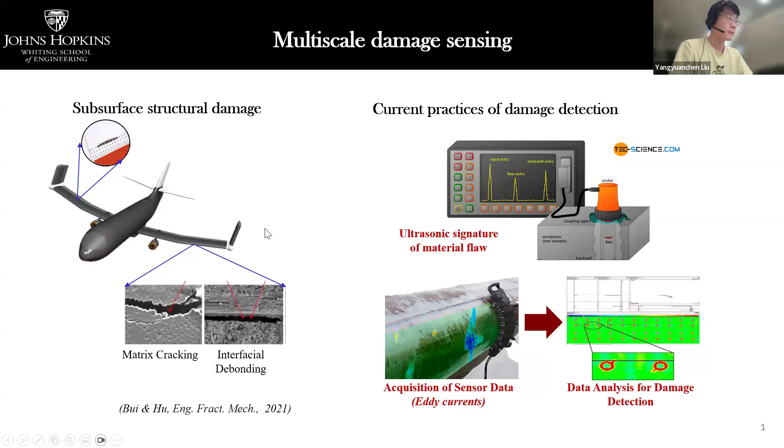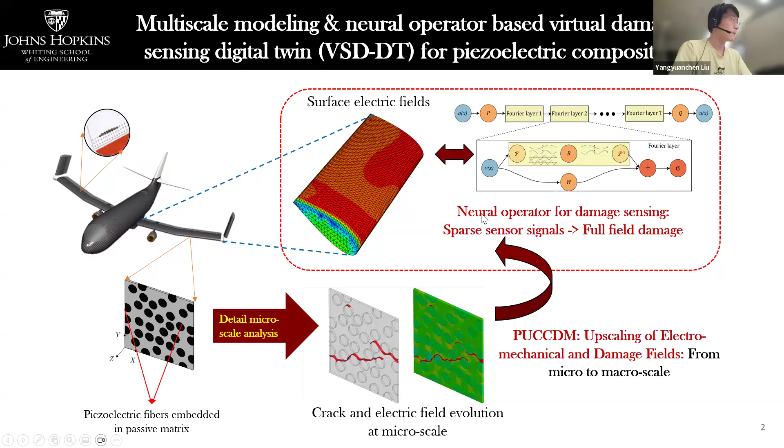So this development work has a two-step approach. The first, of course, is a bottom-up model. That's our physics underlying it, which connects microstructure features to a thermodynamically consistent structure-scale model. So this is our PUCCDM model, completed in previous work. The PUCCDM provides the foundation for the VSD-DT framework.

It is based on the microstructure descriptors, or RAMPs, representative aggregated microstructure parameters. These are used to describe each microstructure. So for our piezocomposite, the microstructure RVE includes fibers and the matrix, and we use the volume fraction and the two-point correlation functions to describe this microstructure.

So these are our microstructure descriptors, and we run about 300 microscale simulations to form this homogenized response database, or MRDB. And these two are used as the input parameters to calibrate the upscaled continuum damage model.

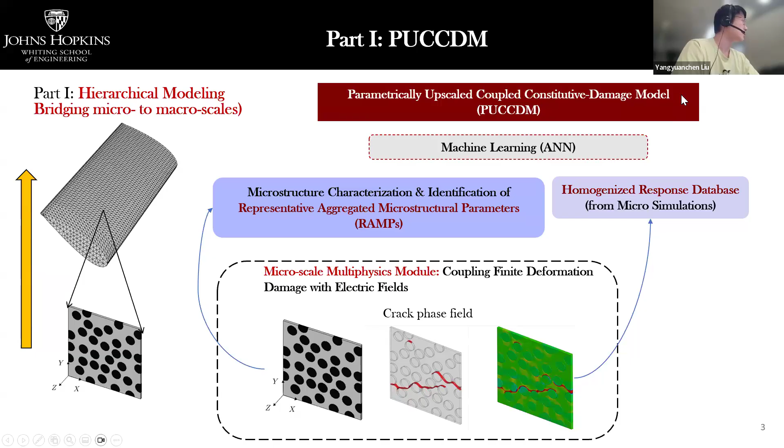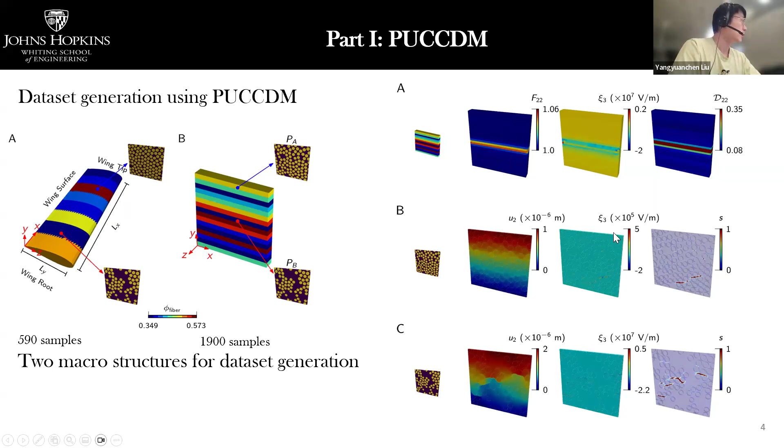Okay, so this is the training dataset for the neural operators. And part two, the stage two, is a geometry-informed neural operator.

This involves connecting the macroscopic electric signals at specific locations, the sensor locations, to microstructural damage, and answering these questions concerning where damage starts and how it propagates at the microscale in the end. So I will introduce this neural operator part in detail in the following slides.

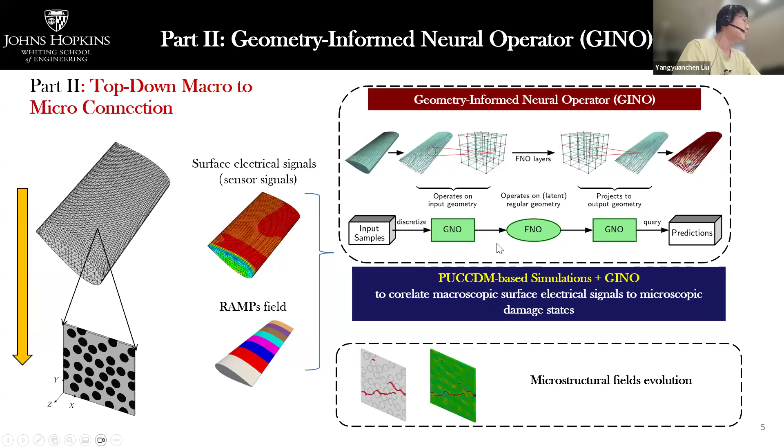Okay, so I will talk a little bit on what is a neural operator and what is FNO and GNO before we come to the result parts. So a neural operator seeks to approximate a mapping between function spaces rather than between fixed size vectors. Given many examples of input-output field pairs, say the boundary conditions and the solutions to a PDE, or initial conditions and the solution field, or just some coefficients, it learns the operator that produces the latter from the former.

For example, for the elliptic PDE, the Darcy flow problem, you have input as the permeability field, and output will be the pressure field. For the initial value problem, like the heat equation, given the temperature field at time 0, what is the temperature at time 1? This is the problem of PDE solving. And the neural operator is trying to solve these kinds of questions.

And it is similar to our standard neural network. Operator learning requires some equations of interest, like your heat equation and the Darcy flow problem. And you need some data sets, and you have a standardized training pipeline, which is very standard for any supervised learning neural network case. For your data set, you initialize your neural network, and you have your input and output for the n epochs. For the forward pass, you compute the prediction from your neural network model, and you minimize the loss between the ground truths and your predictions.

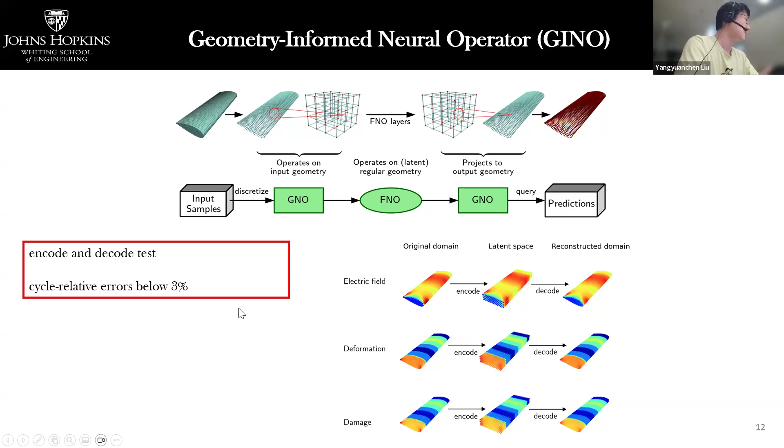So here, before actually using our FNO to predict, I tested just the geometry encoder and decoder to see how well it works. What I did is map these three different fields from the airfoil to the structural latent space and decode them back to the original space. And we compare these reconstructed fields to the original fields. And I find the relative error is below 3%. So I think it's totally acceptable.

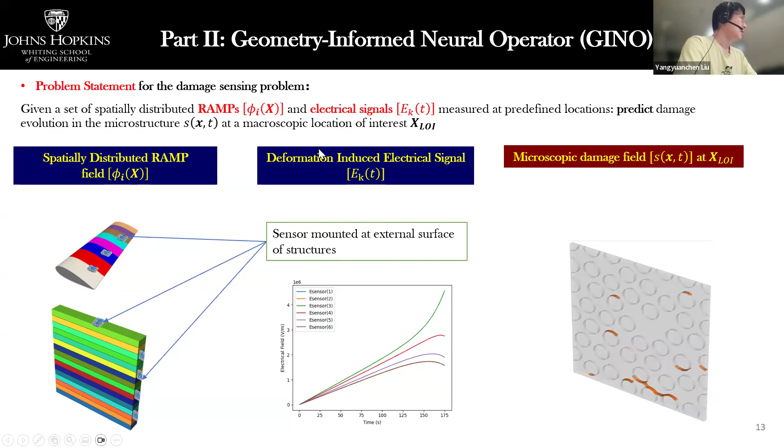Okay, now we can come back to the problem of interest. The problem statement of the damage sensing problem for our case is: given a set of spatially distributed RAMP fields, the material fields, illustrated by different colors here, and electric signals measured at predefined locations. For example, this shows the sensor locations at the external surface. But this does not need to be fixed. We can have multiple different sensor layouts as inputs in our training. And we want to finally predict the damage evolution in the microstructures at any point at the structure level.

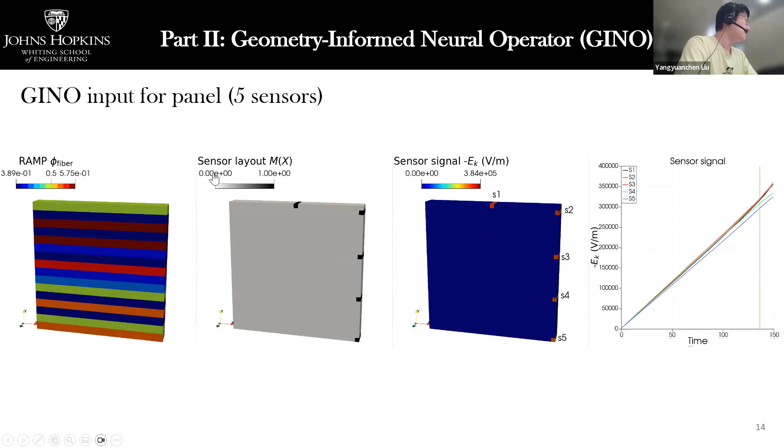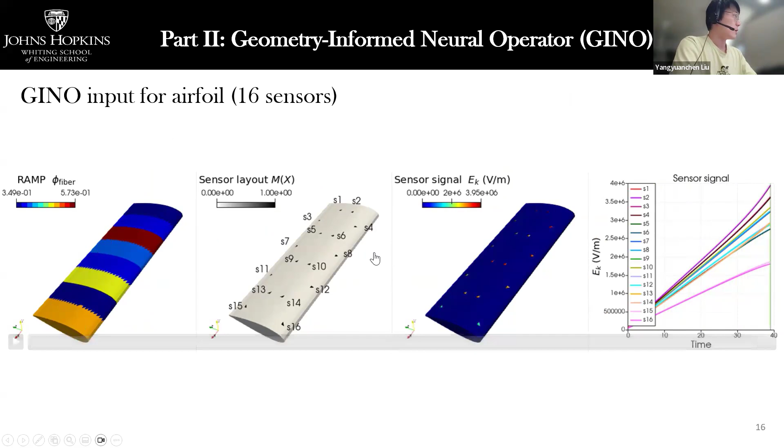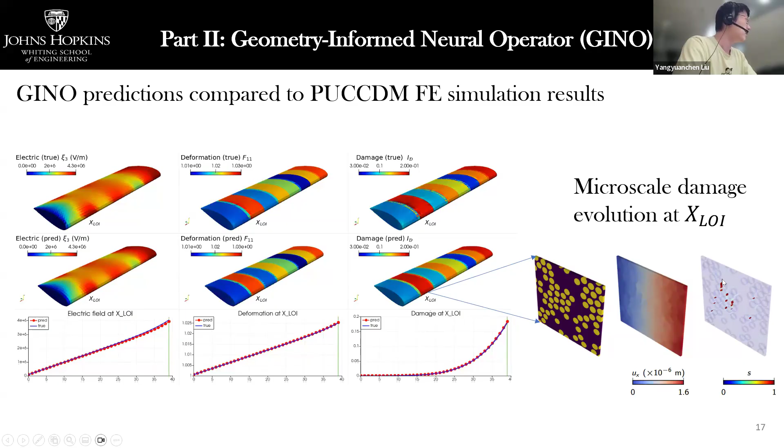And this is another example for the airfoil. For this case, we have 16 sensors on the top surface of the airfoil. You can see the electric signal changing with time. These are the inputs, and these are the outputs. The predicted field is the second row. You can see the great match between the prediction and the ground truth from the finite element. And we probe this point, which has the highest damage rate, and compare it to the finite element results. And again, we enforce the electric field and deformation field onto the microstructure at this point to get the microscale crack evolution.

So this is some downstream application for our neural operator, because once it's trained, it can be used for any kind of new sensor layouts. So this can be used as an optimizer to find some optimal sensor layout using a genetic algorithm. This is a very simple genetic algorithm, relatively small size for each population, just to do a proof of concept work.

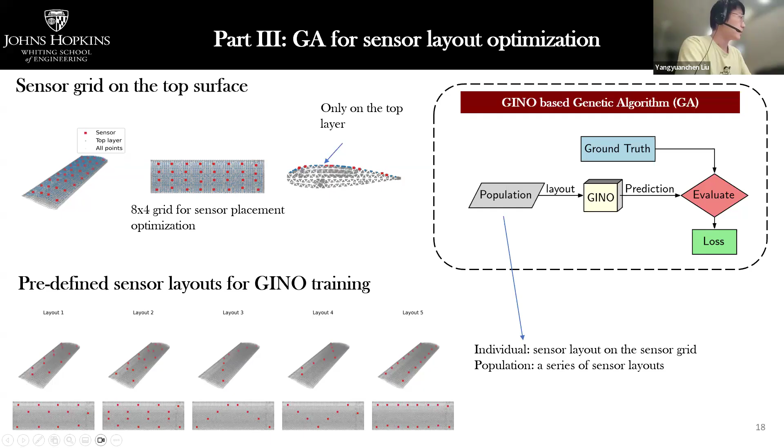So in the training, we actually include 5 different sensor layouts. They are predefined. I was just trying to cover most of the top surface. But in the GA, we're trying to find out some optimal sensor layout that has a better prediction for your GINO. So you can see that it finally tries to converge to some sensor layout here.

But again, this is just a proof of concept because we are not using a very large searching space, and each generation has a relatively small number of individuals. I think we have like 50 something here, but it requires the sensors to live only on the external surface. But this provides you some insight on where you should put your sensors,

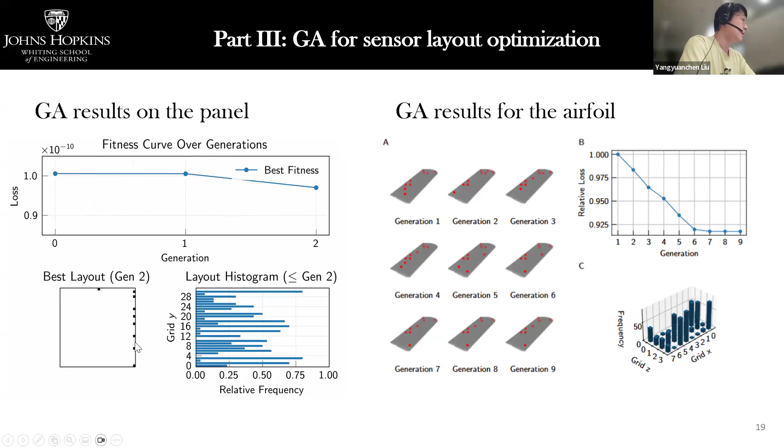because you can see the frequency. This is a choice by the GA and the GINO. And also here you can see that for the panel, it tried to search for the best place to put sensors. Okay, that's it.

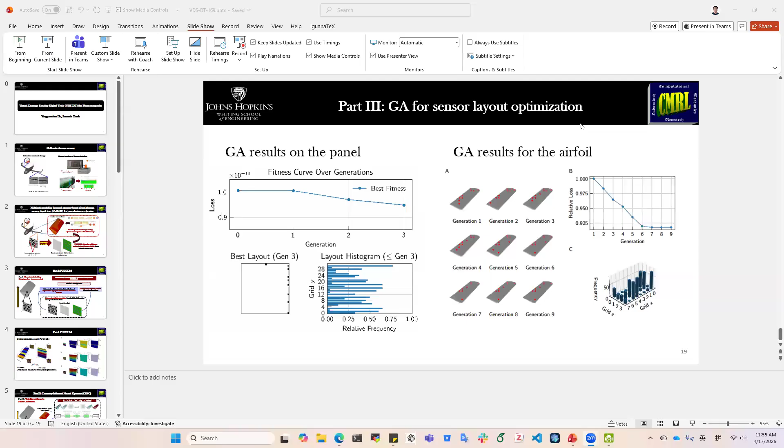Yeah, I do have a couple of questions, and thank you for your wonderful presentation. I may have missed some points. The first question is about your microstructure constitutive law, because you are saying you have sort of random particles distributed in the matrix. At your microstructure level, what's your constitutive law for each constituent material and how do you embed your damage?

Yeah. So this part basically includes two models. One is the micromechanics model, right? In the micromechanics model, we have piezo fibers and this epoxy matrix. We used finite strain formulation for them, and this includes a crack phase field to describe the micro cracks. I think that's what you asked, right? Yeah, and how you embed sort of...

Piezoelectric, yeah, piezo fibers. Oh, okay. So these are piezo fibers. I see. So basically the matrix does not have piezo? No. The matrix is epoxy, only dielectric. Okay. And then you run sort of RVE simulation in the microstructure? This is complicated, right? The first stage is we run microscale simulation. So this is like the upscaling part.

In the upscaling part, you first have to run, I think we have run 350 microscale simulations. Then you use these representative descriptors. They basically describe your microstructure, because we have many different microstructures, and they are the inputs, and the output is the homogenized response, and they are connected through some machine learning, just the simplest machine learning.

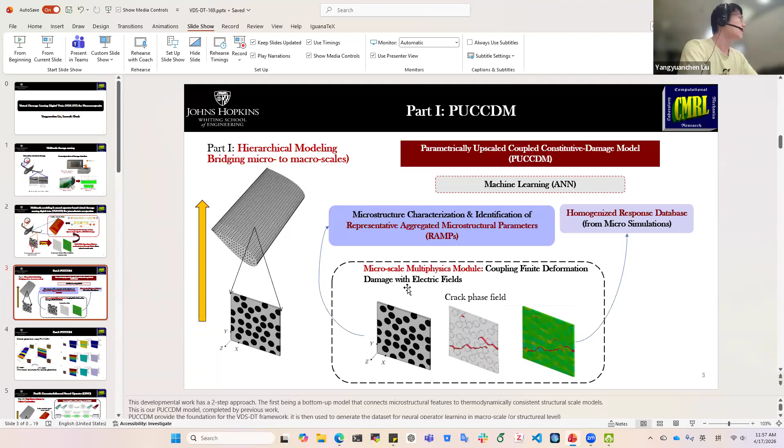you care about. Yes. This is used to calibrate those material properties, right? Because what you get is the deformation, and you're using that to calibrate your continuum level model. Is that clear? Okay, great, thank you.

Hi, Dr. Liu. Thank you for this presentation. I have one question about the mapping from the latent space.

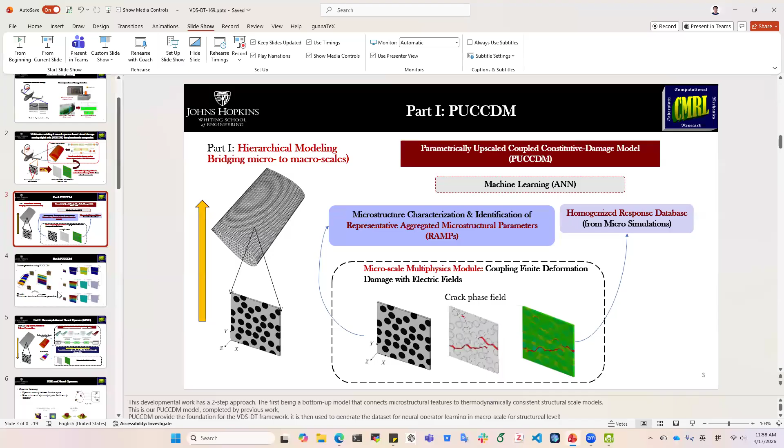Okay. Yes, this one. So I wonder if it's just like the mapping from the natural coordinates to the real coordinates, or will the latent space always be like this structured cubic space, or will that be different depending on your structure? That's something you can choose. Latent space dimensions, you can choose. So we choose it as 3D because 3D is most easy to visualize, as I showed here. But actually, you don't have to use that. You can use higher dimensions. You can always use a higher dimension latent space, but it's always structured so that we can run FNO on that.

Yeah, so when we choose a three-dimensional latent space, supposing I have a hole, or topologically disconnected parts included. For example, I have a hole or something like donuts inside. Will you use the same latent space or use a different one? That's still an ongoing problem.

So the geometry-aware neural operators, they're still ongoing research questions, because currently I only tested on different but similar geometries. That means they have the same topology structures. Like if you have a hole, you can have a different shape of hole, but I didn't test it on a different number of holes, because I assume it's not going to be that easy. Do you get that? Yeah.

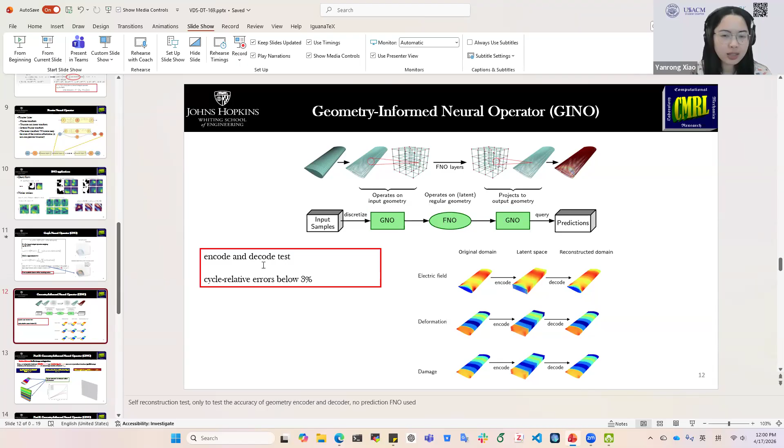I also got one question. What is the data set to train this GINO? Does it require a lot of data? Okay, so I have to clarify that our problem is still relatively easy because we're only using one specific type of loading, right? In a real case, you will want any kind of loading. We are basically only playing with material arrangement.

So in a real case, you will have all kinds of loading boundary conditions that may require much larger data sets. Currently, only several hundred, which is very, very small. It's still a toy problem. Gotcha. Thank you so much.

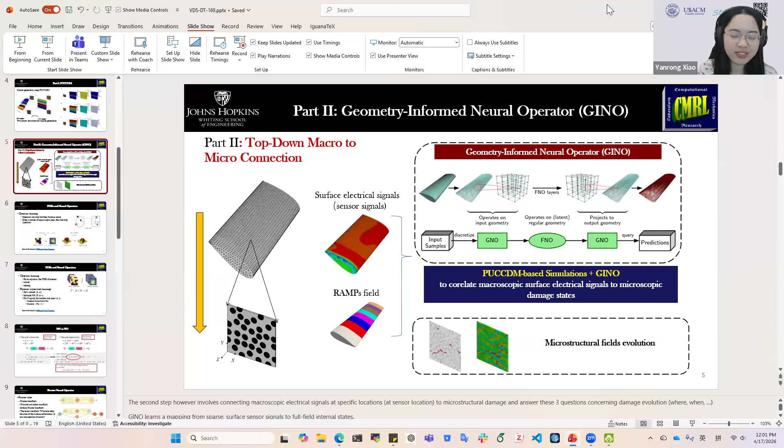Okay. And I also have some general questions. Please feel free to break in if you also have other questions. Can this framework be extended beyond piezocomposites to other anisotropic materials? It should work for any multifunctional material system. That means you need more than one material block. Because if it's uniform, there's no point doing this. You can always use something much easier.

But as long as you have multiple materials and the material information, this is possibly totally doable. It's not tied to piezocomposites or anything. You just need different material blocks. Yes, because this framework looks like it provides a very efficient reduced order method for the multiscale analysis of those materials.

I also noticed that you have research experience at both Duke and Johns Hopkins universities. How do you like it? And did those research experiences shape your research path in different ways? So I would say that Duke has a much smaller campus. It's a very small and quiet campus. But I still enjoy doing research there. You only have a very small research group, but you can communicate with your advisors very frequently. But here at Johns Hopkins, we have many opportunities to attend seminar sessions and posters for the students.